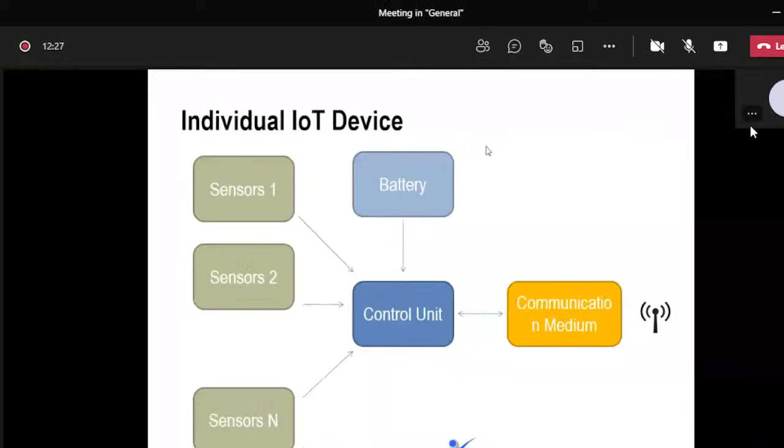If you see a network of IoT devices, different individual IoT devices are connected and can transfer information among each other using internet as a medium. So we can achieve a network of devices here.

The next thing, if you see the general thing about Internet of Things, it is going to provide a better scope for data scientists, and we can have real-time analysis and wide connectivity.

So if you see the main thing required for this Internet of Things is going to be the general devices and the sensing devices. These two are the most important things. The general devices are categorized as an embedded processor or a microcontroller based unit. And the second one is going to be the connectivity for the platform.

Connectivity for the platform, where we can connect and share information through wired mode, or else we can go for wireless mode in order to have data transfer.

If you see the sensing devices, the sensing devices are sensors which are going to measure the parameters, for example, temperature, noise, light intensity, and if you want to measure the humidity. So like this, we can measure different parameters by using sensors.

The general devices and the sensing devices are the major important thing for an IoT system. The best example is where the home appliances are controlled by sensors. So each sensor is going to help us to solve the problems.

Okay, so in the small video you have just come across, how NI is providing solutions on different engineering problems, how NI is giving solutions on different industry sectors. Same thing whatever you people have seen on slide, they're providing support to solve engineering problems on semiconductor based industries, automotive.

Automotive, when it comes into picture, for electrical vehicles, that is the most important thing moving around the world. For battery management systems, and to simulate and analyze the performance of electric motors used in electric vehicles, they are developing HIL hardware-in-loop systems where they can simulate the motor and check its performance in the system itself. And for ABS anti-locking braking systems, or electronic control units, in order to test the ECU present in the car, they will be using NI technologies, software as well as hardware platforms.

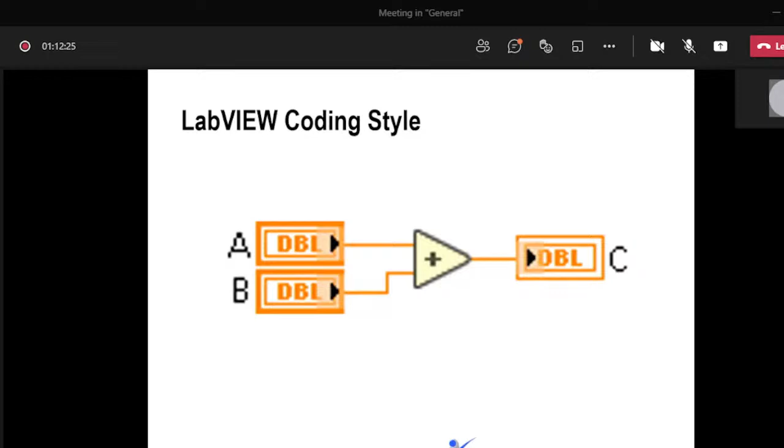Another important reason for using LabVIEW software is that it has a lot of software libraries. We can easily integrate third-party hardware, and you can also integrate or connect your NI hardwares. So this is another reason.

As I told you, the name itself is Laboratory Virtual Instrument Engineering Workbench. So we can build a virtual instrument by using LabVIEW software and the hardware.

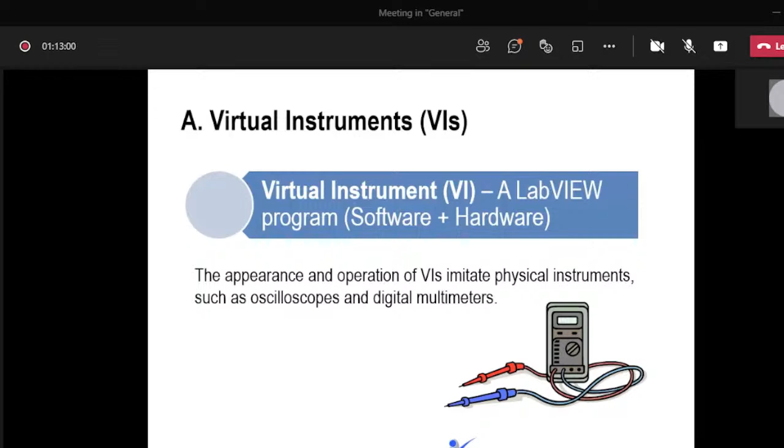The best example I can tell you is these two devices, known to all people: one is the CRO and another is the multimeter, used to measure information like voltage, current, and other parameters. On the oscilloscope you can view the information as a waveform. This equipment can be virtually built by using NI hardware.

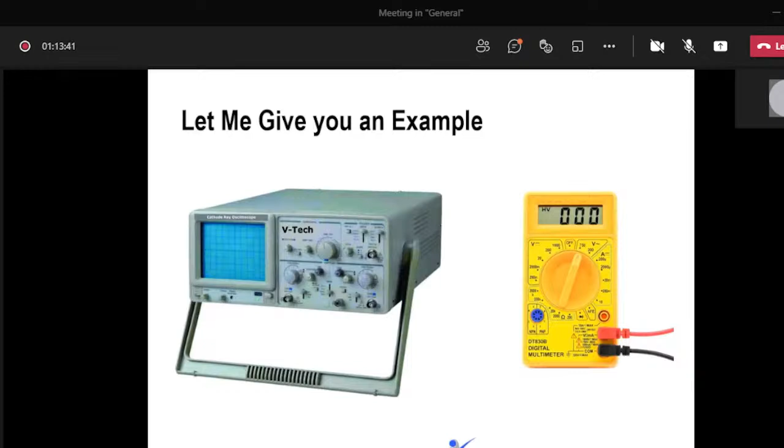So virtual instrumentation is a combination of software and hardware. If we know how to work with LabVIEW and NI hardware, we can virtually build the equipment.

This is the virtual oscilloscope, exactly what your real-time one does. The same thing can be done with the help of this virtual oscilloscope.

And the next one, digital multimeter, which is used to measure different parameters like voltage, current, continuity, all that information. It is making our job very simple.

If you know how to work with NI hardware and LabVIEW software, if you want to do any experiments or test any circuits, instead of moving into a lab with a function generator, oscilloscope and all those things, if you have a breadboard and the respective components in your place, you can just connect it, build a circuit, use NI hardware and LabVIEW software, and complete your experiment right at your workplace.

And if you want to make a remote or IoT based system, make your system connected to the internet, and you can share information from one place to another. This is an example of virtual instruments, where we can make our workplace an engineering workstation.

So with this, the explanation about the Internet of Things is over, our introduction to IoT technology is over. Next we are going to move into the demo part. First we'll learn about the LabVIEW tool, LabVIEW software, and the different functions available here which will help us develop an IoT based system — only the basics, not in depth.

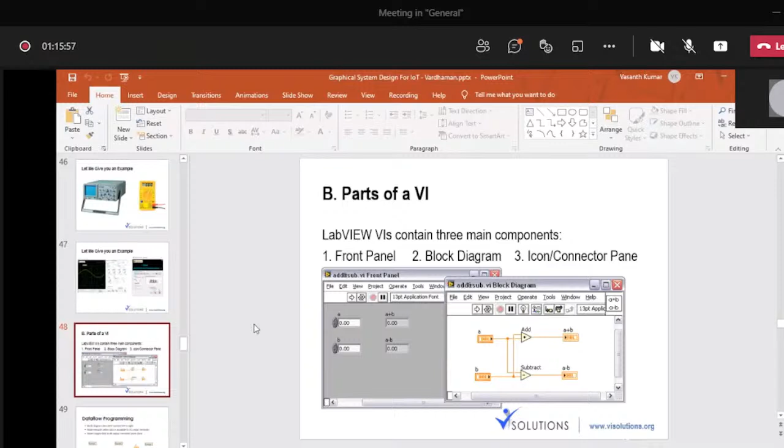So with this, I'm moving into LabVIEW programming. I hope you have installed the LabVIEW software in your systems. When you search your Windows button and type LabVIEW, you'll get the software installed here. When you open the LabVIEW software, this is the screen we get in order to create a VI.

Here, each and every program will be called a VI. VI corresponds to virtual instrument. So if you want to create a VI, go to File, click File, and you can see there is an option called New VI. Just click on New VI, or else we have a shortcut called Control N. Click on New VI.

Once you click on new VI, you will get two screens. Whenever you open a LabVIEW file, you will always get two screens. One is called the front panel and the other is called the block diagram.

You can ask a question: what is the use of front panel and block diagram? In the previous slide, I told you that SpaceX used LabVIEW software to build GUI, graphical user interface. So in order to make a GUI in LabVIEW, we need a front panel and a block diagram.

So what is the use of front panel? Front panel is for the user interface, where the user can interact with the program through the front panel. And what is the use of block diagram? Block diagram is the place where we'll be developing the application, where we'll be developing the logic.

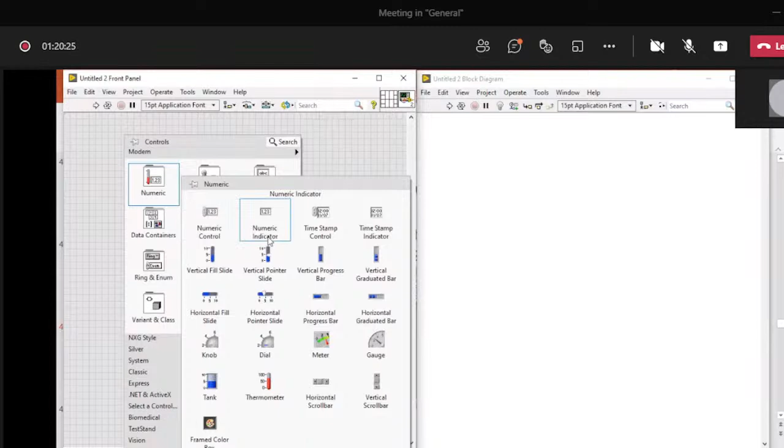If I place my cursor on the boolean palette, I'll get the respective boolean controls and indicators, same way for strings and for arrays and clusters. So all your controls and indicators will be available in the front panel, in the control palette.

If I right click on the block diagram and place my cursor on the numeric palette, all the respective functions or operators will be available in the block diagram. Boolean functions will be available the same way, and array functions will be available there. So this is how you can get your functions and your controls and indicators in LabVIEW.

So the basic thing, as I told you, if you want to develop a small application, a small addition program application, right...

So we need two controls and one indicator. Right click on the front panel, go to numeric. We have a numeric control. Just click and place it here.

So this is how your control looks, and you can see here in the block diagram it is enveloped by an orange color. One advantage here is each and every data type will be represented with different colors. So numeric, the DBL data type, fractional numbers, a double precision floating point number, will be covered by an envelope box. It looks orange in color.

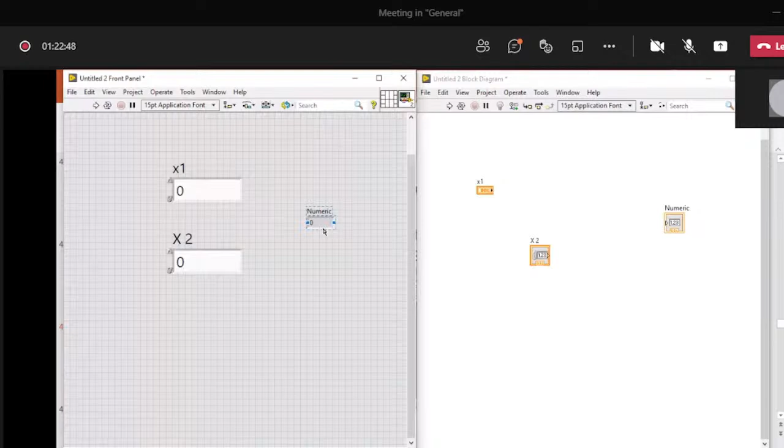If you want to have another control, right click, go for numeric control, and place it in the front panel. So now another one, I can give it as x2, x1. To see the result, I need an indicator. See, this is an indicator. So the result is going to be y equal to x1 plus x2.

So to add two numbers, we have two controls and one indicator. We need an operator. Go to the numeric palette, there is an addition function. Click and place it here.

So when I connect this, how can we connect? In our breadboard, if we want to connect components, we use wires. In the same way here, we'll be using the wiring tool. Simple: place your cursor on the controls or indicator edges, just click and connect. See, automatically a wire will be available.

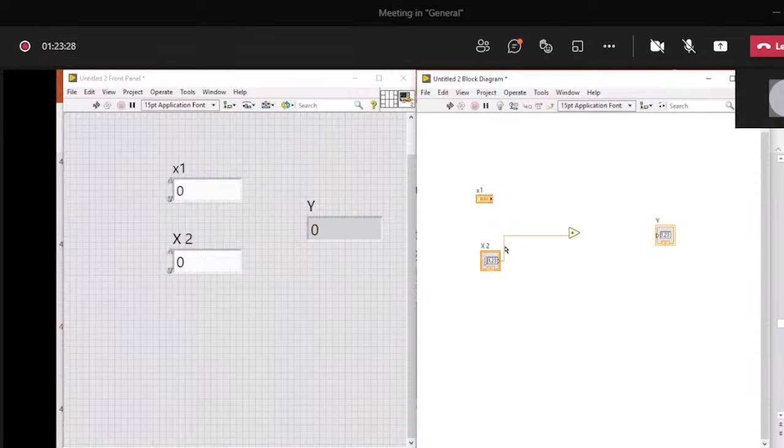Place the cursor on the border, click, and you'll get a black color structure. It's the wiring tool. Just click, drag, click, and you can connect. Click here and connect, that's all, your addition program is done. So we can easily complete the addition program by having a control, indicator, and addition operator.

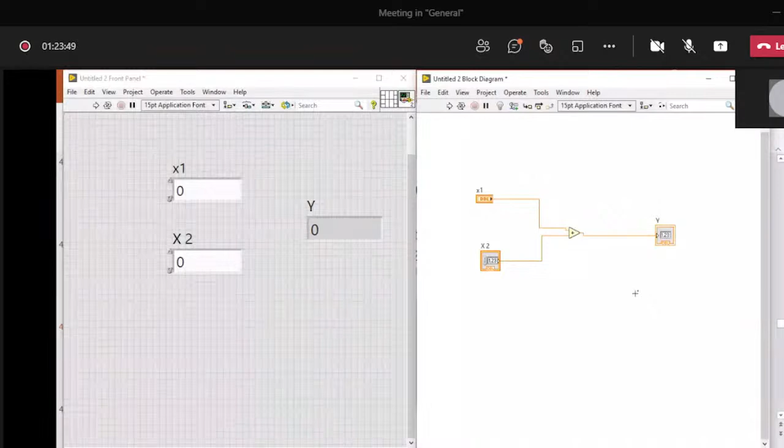If you want to see the result and run the program, press Control R, or else you can go to the menu. Below the menu there is a run arrow mark, which represents run. This will be available in the front panel as well as block diagram.

If you just give a click, the program will run and automatically give the result. So easily an addition program has been done using the graphical programming language LabVIEW, by having only two controls, one indicator, and one operator. This shows a major difference between a text-based programming language and a graphical programming tool.

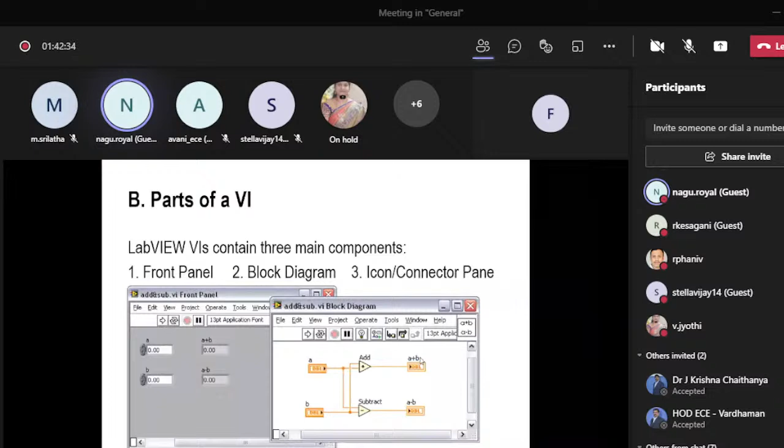So in this session we'll be learning how to develop an IoT based application. So far we have seen the introduction to LabVIEW and the data types, and I've just shown you a small addition program and how LabVIEW differs from other programming languages. LabVIEW follows a data flow programming concept.

When you look at any other text-based programming language, we write lines and lines of code, and each line is executed from top to bottom, from the first line to the last. But here, since it is completely a graphical programming language, it follows data flow programming. You may ask, what is data flow programming? The flow of data from one point to another determines the order of execution. This is what we call the data flow programming concept.

Next, we'll see a few functions, and then we'll move into the hardware part. Before that, I'll open the LabVIEW screen.

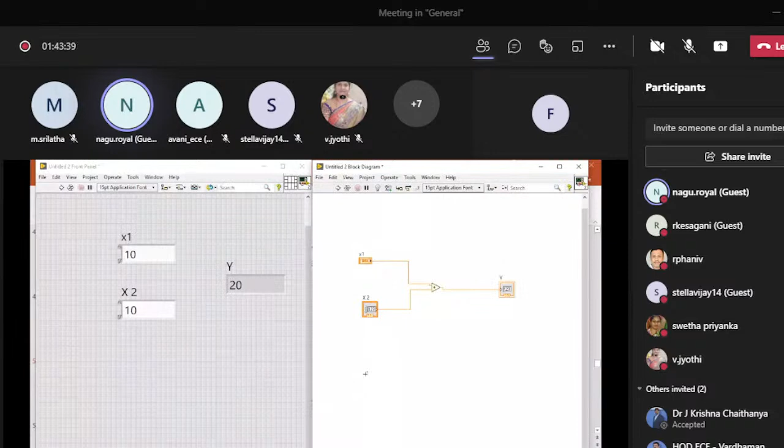I've just shown you only the addition program, right? So if you want to see the other data types available in LabVIEW, let's go for a Boolean, because I'll be using these Boolean data types in the IoT application.

I've taken a Boolean control from the front panel, and the same thing appears in the block diagram. If I right click, I get an option called 'view as icon.' If I remove the tick mark, it appears like a small rectangle box. I'll use a magnifier so I can zoom in.

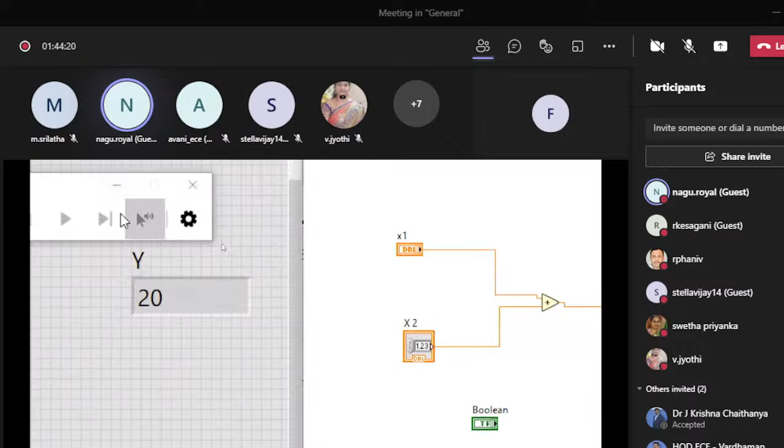This is how your control looks for the Boolean data type. It is green in color. Inside they have mentioned TF, and the green color envelope is the color of the Boolean data type. Now if I take an LED...

If I connect it, this is how the Boolean wire looks - see, it is green in color. So in LabVIEW, your Boolean data type wires will appear green in color.

And if you want to see string, go to the front panel, string control, place it in the block diagram, and see - they are marked as ABC, and it has a pink color. If I make it 'view as icon' by right clicking, this is how it looks. And to have a string indicator, I'll place it here.

I connect. Okay, good. And if I run the code, the data will be passed.

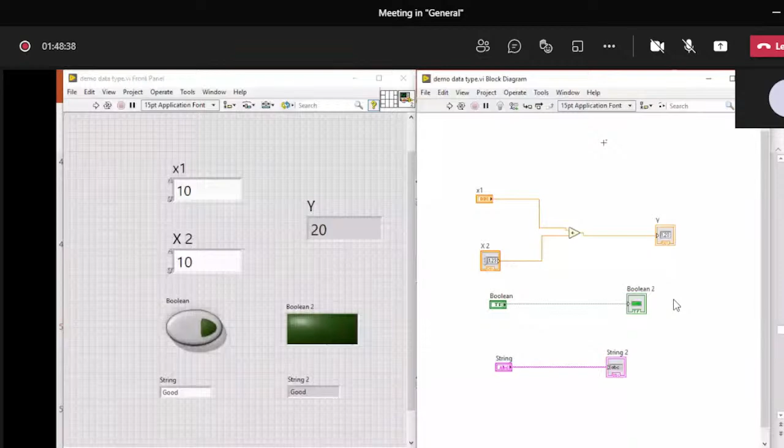We'll not go much deeper about the LabVIEW environment because our goal is to develop an IoT based application, so whichever functions I'm using here, only those functions will be explained. Now I'll be explaining two more functions here.

I'll go to the block diagram part. This is a place where we'll get all the functions and structures which will help us to complete your application. In that, if you see, there is a palette called structure palette.

So there is a palette called structure palette. If you see here, these are the different structures which are supported by LabVIEW, in order to do any process.

Simple example: when we go for text-based programming, whenever you have a conditional based requirement, we will be using the if-else statement. If the condition is true, then you want to perform an action, so you will use if-else. You will be writing another portion of code, where we can see whenever the condition is false, if you want to take some action, you can develop the logic in your false statement.

So when you go for text based programming, you need to follow syntax. But as it is a graphical based programming language, syntax is not required here. And if you see, the same if-else statement, the conditional based requirements can be developed and applied in LabVIEW also.

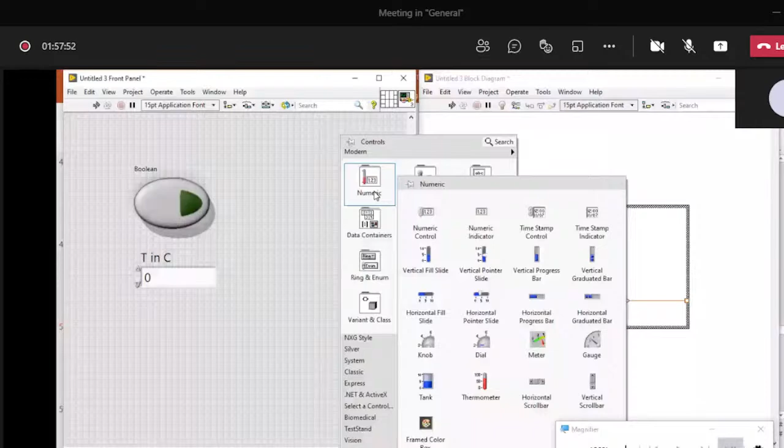Create constant, I'll go for 32. The result will be displayed in an indicator, right? So right click, numeric indicator. It's here. T in F, okay, so that I can give it here.

So this is your result, and if you see here, when the value is false, I want to see the temperature value as Celsius.

One concept here: whenever you try to pass any value from outside of the case structure, a tunnel from inside to outside is created, and this is what we call an output tunnel. If you see, the tunnel is not completely filled by the data type color, because we have one more case called false case, where the tunnel is not wired with any value. That's why it is not filled by the data type color.

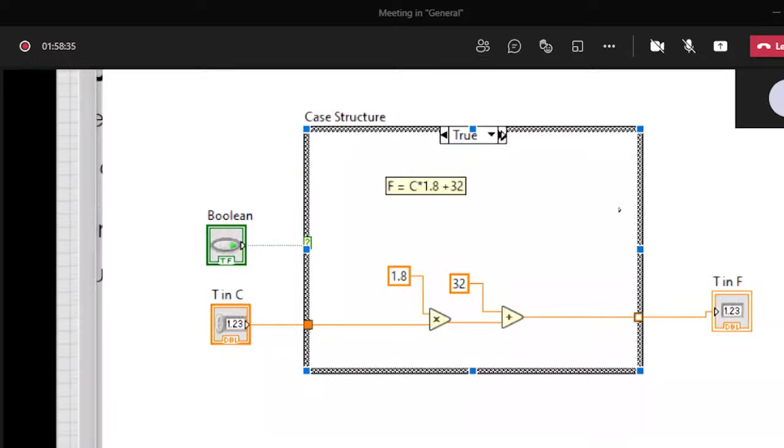And if you see, the run arrow mark appears in broken format. The concept is, whenever we try to create a tunnel at the right hand side of the case structure, that tunnel is called an output tunnel. That tunnel should be wired in all the cases, or else your run arrow mark will appear in broken format.

So here I want the value to be directly displayed in Celsius when the condition is false, so directly you can connect. I'll mention C/F, because when the condition is false, it will be in Celsius. When the condition is true, it will be mentioned in Fahrenheit.

Even I can change the label also. For that, I need to do small logics over there. Even if you want to see that, I can change the label.

During the false case, create - there is something called property node. Please don't focus on this, I'll just change this label around.

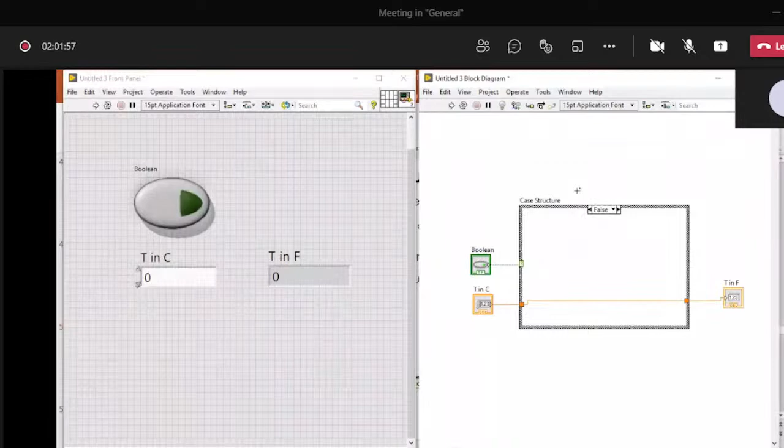Sir, continue sir. Yes ma'am, thank you. Now when I just run the code, when I just enter the temperature value as 100, I have not pressed the button, the value is false, so that's why the value is directly displayed. When I click the button, the true case gets executed, so your Celsius value will be converted into Fahrenheit and displayed in the indicator. When I press the run continuous button again, the program will come out of execution.

So this is how you can make use of case structure, whenever a conditional based requirement comes into picture. By implementing this case structure, you can implement a conditional based requirement which we implement in text-based programming language using if-else statement. In LabVIEW, we use case structure for that.

So this is how your case structure works. Just know how it works, that's fine for now, because we have short time, we have to discuss the hardware used for IoT based application, and finally move into the application development part. So I'll save this also if you want.

I'll just save this, hit save, and now I'll close this new VI.

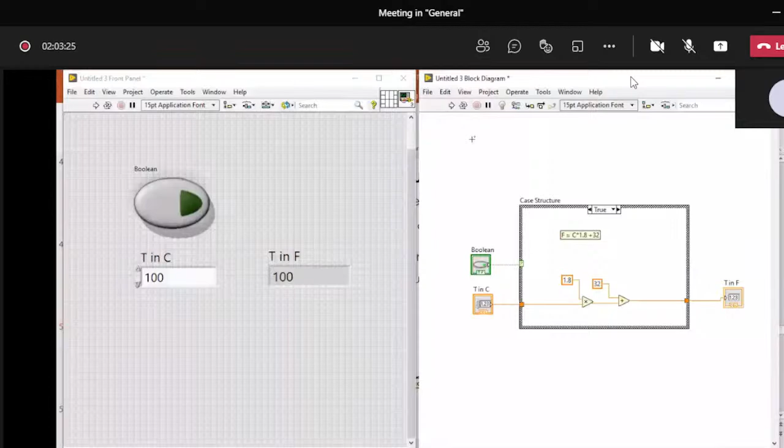Let us move to the hardware part, which I'm going to use for today's IoT based application development, and then we'll come back to a few more concepts. Today, as the FDP is titled on Internet of Things, we've discussed IoT concepts, IoT architecture, and industrial Internet of Things. So we are going to see a live demo of how we can transfer data from a hardware - how, when a sensor is connected to a hardware, we can read the real-time data.

So, when the device as well as another device is connected through internet as a medium. For that, today I have chosen NI technology, National Instruments, which has both hardware as well as software platform. The software I'm going to use to develop an IoT based application is LabVIEW, and the hardware I'm going to use for today's IoT application development is Rio. The hardware name is called myRIO.

myRIO comes under the National Instruments family of hardware. The expansion for this Rio hardware is reconfigurable input output. Using this hardware, we are going to build an IoT based application. You can ask the question, why did you choose this Rio hardware? Because NI has a lot of family of hardwares used for application development.

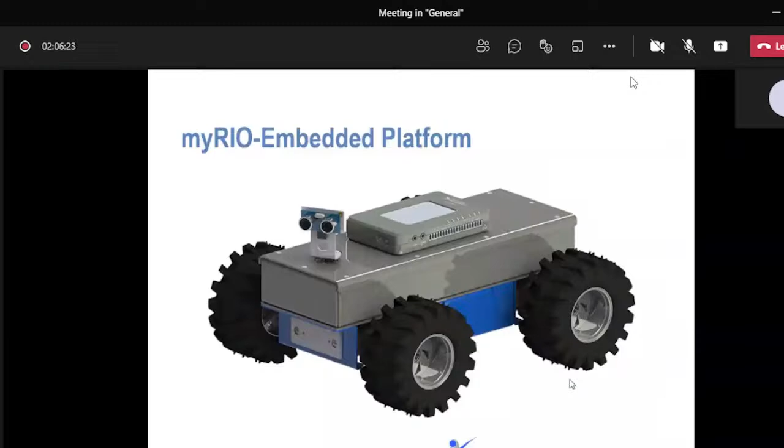But when I go for a Rio family hardware, it's an embedded based platform as well as FPGA based hardware, where I can develop the application, dump the code on the respective hardware, and make a standalone system, or develop real-time applications. Today I'm going to use a hardware called myRIO, which comes under a family called Rio family hardware. Rio stands for reconfigurable input output, where NI has a lot of hardwares mainly used for application development. If you want to see, I'll show only the Rio family hardware.

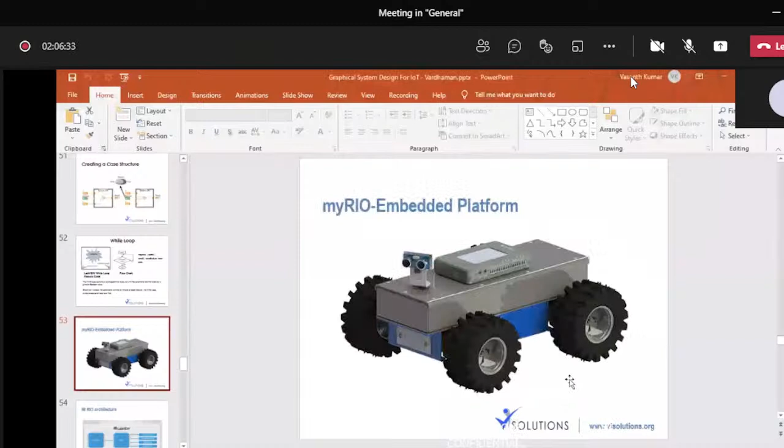NI Rio hardwares, I'll directly go for image. So it's loading. Yes, if you see here, these are the different Rio family hardwares available under NI technology. If you see here, the image which I'm showing now, I'll just try to put the image here. Yes, because with this I can explain all the concepts. So how the hardware will be.

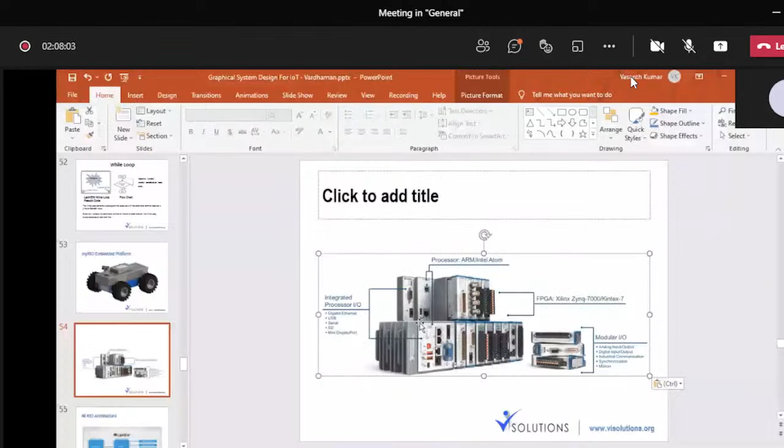Yes, if you see here, this is what we call as Compact Rio. The short form we call as CRIO, which is mainly used for real-time application development. You can ask, what is the advantage of using this hardware, sir? This hardware is rugged in nature, you can use it in any environment, and the most important thing is it has an FPGA inbuilt, and it has a processor also, where you can create a standalone system.

So once you develop an application, as it has a processor here, you can just dump the code in the processor, and you can make this hardware work on its own. No need to be always interfaced with your computer in order to have a data transfer, because this has a processor, it has RAM, it has ROM, it has memory. So we can dump the code and make your application a standalone.

Another thing, this hardware has a capability to interface with internet, so you can have a data transfer. You have an option to connect your Ethernet ports over there. And if you want to have data logging, if you want to connect a USB camera, or if you want to connect a pen drive where you want to log the data, we have a separate slot over there - insert it, and you can make a data logging system also.

And as this hardware has FPGA also, you can develop your program either in processor as well as FPGA, or else you can make use of the processor as well as FPGA in an efficient way to develop the applications. And if you see here, we have something called modular input output - these are called C series modules, we call these actually C series IO modules.

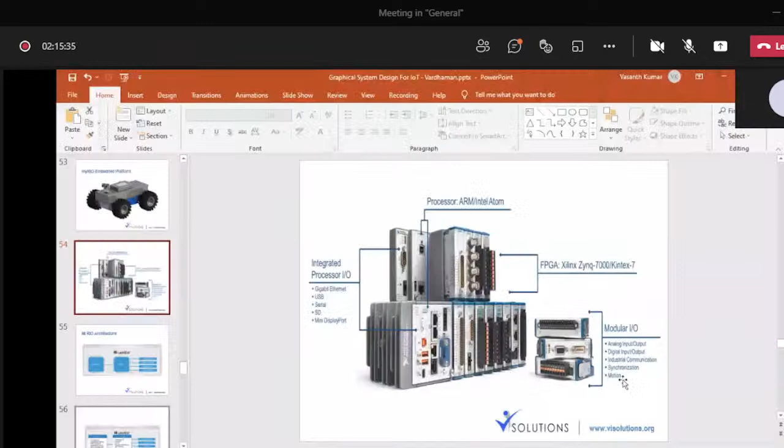I can give you a good example. Everyone knows about cars. Cars have safety airbags which protect drivers and passengers when they meet an accident. Whenever the car hits a barrier at a certain frequency, automatically the airbag comes out without delay and safeguards the passenger. If we use a general purpose operating system, we cannot guarantee that at that exact instant the airbags will come out, because it is doing multitasking and the processor is shared for different tasks. Even a small delay would injure the passengers inside the car.

So in those kinds of critical-based applications, we will not go for general purpose operating systems. That's why whenever we want to make a real-time system, we go for Linux-based operating systems.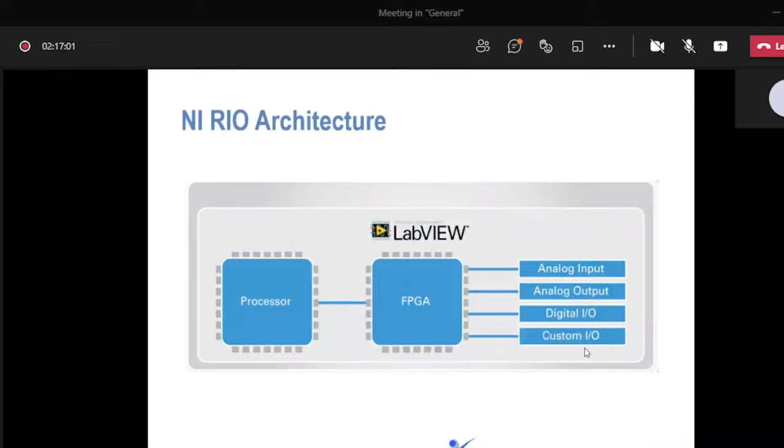If you see, the RIO hardware is also having a Linux operating system inside it. This is the architecture for the RIO hardware. The RIO hardware has a processor, an FPGA, analog input outputs, custom IOs, and digital input outputs. This hardware has a real-time operating system, and it is like a regular computer.

For example, when you buy a computer, first you have to install the operating system, and then install the application software required to work on your laptop. In the same way, with the RIO hardware, we have to first install the operating system, and to develop the application side, we need to install the respective application software and drivers inside this hardware.

As I told you, it has an FPGA processor as well as IOs. Since all the input outputs are connected directly to the FPGA IO, there will not be any delay between the IO terminals and the FPGA systems. As it is directly connected, the values are passed directly to the FPGA through the processor and get processed. It's not that you have to develop code only on FPGA or only on processor - we can make use of both processor and FPGA efficiently to develop a standardized application. So this is the architecture for RIO hardware.

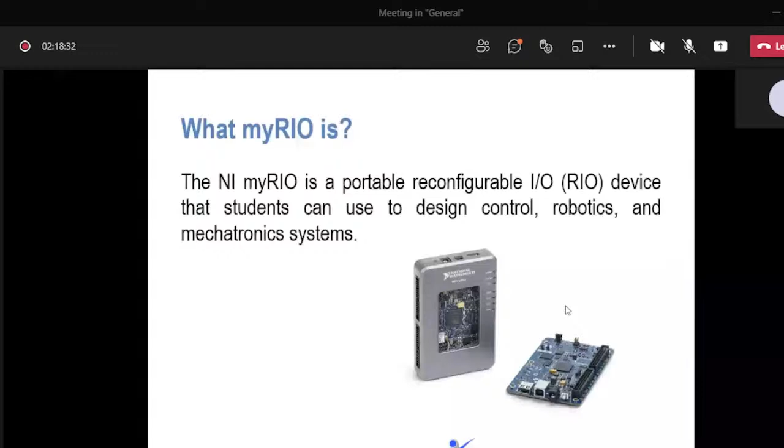For today's session, I'll be showing a demo on myRIO, which is called Reconfigurable Input and Output, the expansion, which we can use for control robotics and other application development processes. I am using this hardware for today's demonstration. Why I have chosen this hardware is because it has an embedded processor and FPGA inbuilt, and I can develop a standalone system.

The most important thing is this hardware has the capability to generate a Wi-Fi signal up to 150 meters. It has an onboard Wi-Fi, or we can connect this software with the hardware using existing software or existing internet available, and have data transfer. That's why I have chosen this hardware for an IoT demo.

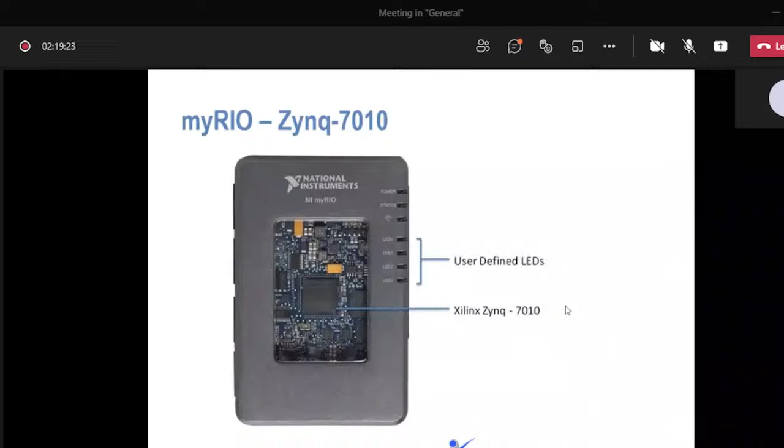Now if you see, this hardware has some onboard devices. It has 4 user LEDs. It has an accelerometer onboard. It also has a push button, so where you can make use of it for your application development.

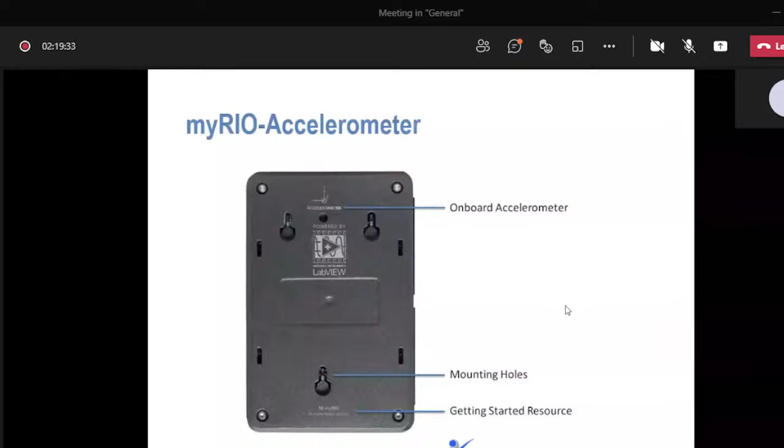Now, since this is an electronic device, it needs a power supply, so it needs 6 to 16 volt power supply. There is an option called device, which will help us connect your PC and your Rio hardware for code development and code deployment. At the same time, if you want to do any configuration settings, make sure your Rio as well as your system are connected through this device port. There is also a USB port for connecting your USB based devices.

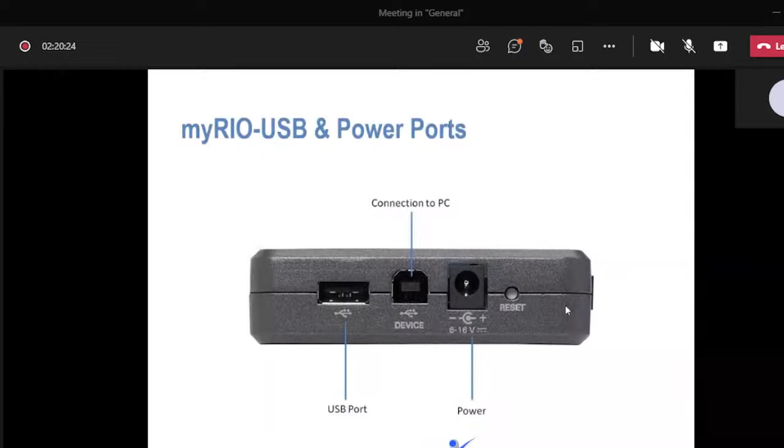You can just make use of these pins either as digital in or digital out, or a combination of both, few pins as DI and few pins as DO. At the same time, if you want to generate PWM signals, you can go for DIO 7 and DIO 3. You can make use of these pinouts to connect your analog and digital sensors.

Now next, if you see, we have 2 more pinouts, one is called MXP A port and MXP B port. These have 2 ports, A port and B port, which are used for connecting your sensors. It has analog input pins, analog output pins, digital input pins, and digital output pins.

So if you have any protocol based sensors, like SPI, UART, and I2C based sensors, those sensors also can be connected using this MXP port, and you can acquire the data. This hardware supports serial communication protocols. There are n number of advantages when we go for this Rio hardware, that's why I chose it for today's demonstration.

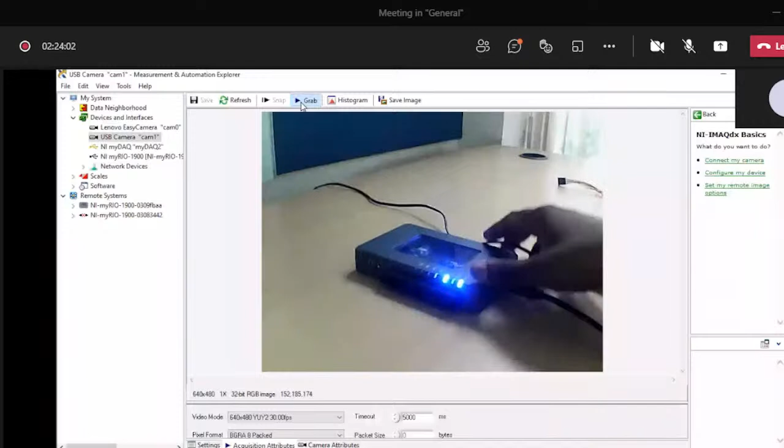Yes, you can see this is the hardware which I'm going to use for today's application development. This hardware is called MyRio, which stands for reconfigurable input output. I hope you people can see the device. As of now, I have connected my hardware through Wi-Fi.

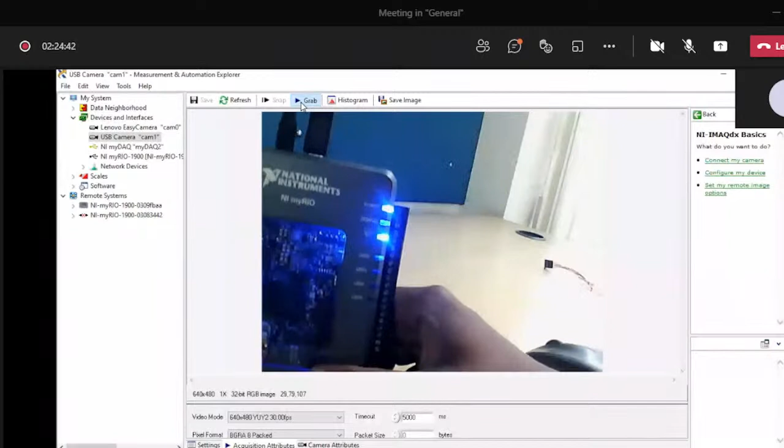So if you look, I can show you clearly, it has a user LED, the power LED is on which means the device is powered, and the Wi-Fi LED is on which means my device is connected through Wi-Fi. It has onboard user LEDs 0, 1, 2, and 3. This device is connected through internet now, and it has a push button as well as a Wi-Fi reset button. This is the hardware which I'm going to use for today's IoT demonstration.

And if you see here, this is the port which we call the MSP port, the mini system port, where it has 8 digital input output pins and analog input output pins.

If you look here, these two ports are what we call the MXP A port and MXP B port, where you can interface your serial communication based protocol sensors and have a data transfer. As of now I'll be using this hardware for application development.

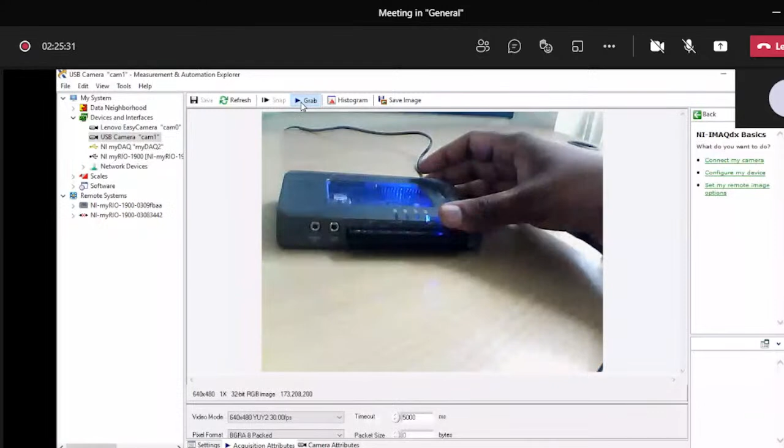This is the hardware I'm going to use for today's application development, and it is configured through Wi-Fi. I'm removing this USB connection also, which is not required now because I've connected my hardware through Wi-Fi. Only the power cord is connected with this hardware. Apart from that, we don't have any connection with the hardware to my personal computer. This is how we have connected it.

Now let us go for application development. Next step is we'll be moving into application development. So I'll just stop the grab.

If you want to see whether the hardware is connected with my system, there is an option called remote system, and there is an option called NI myRIO. This is the hardware which is connected with my laptop through Wi-Fi. I've just used my mobile internet to connect my system as well as my myRIO hardware on the same local network. You can see this is my Wi-Fi name. Through Wi-Fi only my device is connected, that's why my Wi-Fi LED is glowing in blue color.

And if you see the IP address, it is 192.168.43.253. So this is going to be the IP address. Now let me show how to connect this device and how we can develop logics.

Let's see how we can develop the logics to read the information from this hardware. As it has onboard sensors, let us see a small demo of how I can read and write data from this device to my application through wireless mode. Next, we'll see how we can have a data transfer between two different devices when connected through local network, and then we'll see a cloud demonstration.

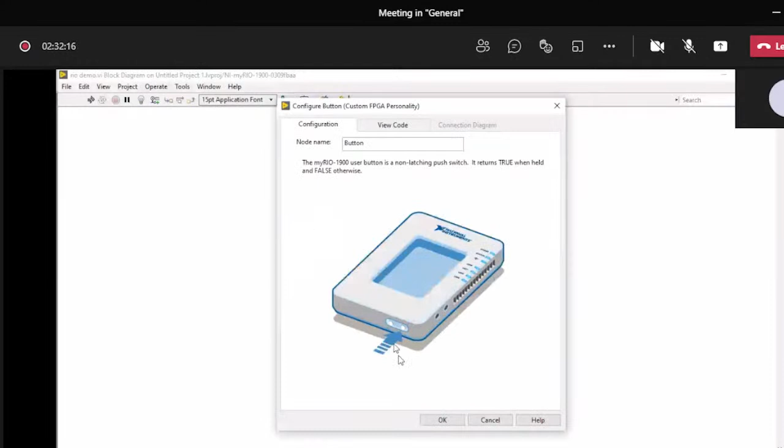Okay, this is the button. So it has to get configured. And next step, I'm going to use an LED, the onboard LED.

So go to the myRIO palette, take the LED, and place it here. Let me use LED 2. Okay, or else I'll use LED 3 alone. Now the LED will be configured, and directly I'm connecting the button and the LED.

To run the program continuously, you can go for run continuous, or else I can use a loop. Let me use a while loop here. I'm introducing a new concept called the while loop. Whenever you want to do any process in a repetitive manner with respect to conditions, you can make use of a loop. So this is how your while loop appears in LabVIEW. Whatever code you develop inside this while loop, it's going to run continuously with respect to the condition.

This while loop has two terminals. One is called the iteration terminal, which tells you how many times the loop executes, and it has a conditional terminal. This conditional terminal is configured as stop if true. When I right click, you can see it is configured as stop if true, which means whenever it reaches its stop value, it will come out of execution. That's why when I right click and create a control, a stop button is automatically created.

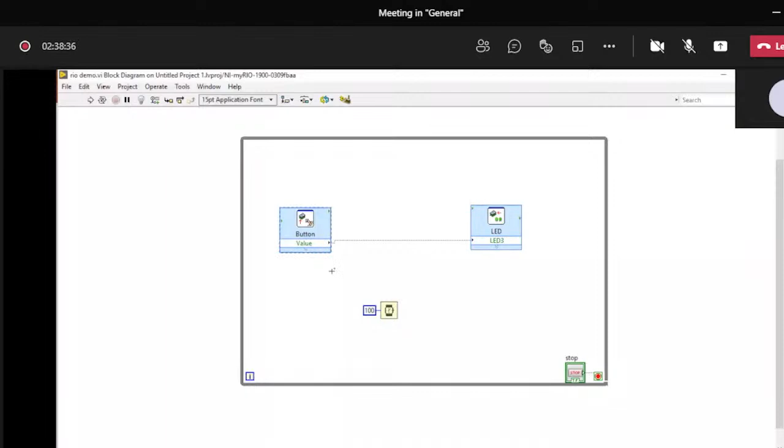Now I'm not going to use a button. See, I have LED 3. When I press a button in my mobile phone, automatically the Rio LED should get turned on and turned off with respect to the command which I'm giving through my mobile phone here.

So for that only we have to use shared variables, or else we call this actually network shared variables. So right now we'll see how we can make use of this shared variables.

In LabVIEW we have different types of variables available. One we call it local variables, which is used to transfer the data in a single VI. Second, we have global variable, which will help us transfer the data between multiple VIs. Third, we have network shared variables where we can transfer the data with different targets, with different LabVIEW targets.

So today I'll be using a shared variable in order to have a data transfer from my mobile phone to my myRIO hardware. So for that, I need to use these shared variables.

At the same time, my myRIO hardware has an accelerometer. This is a 3-axis accelerometer which is used to measure the tilt, vibration, and the acceleration.

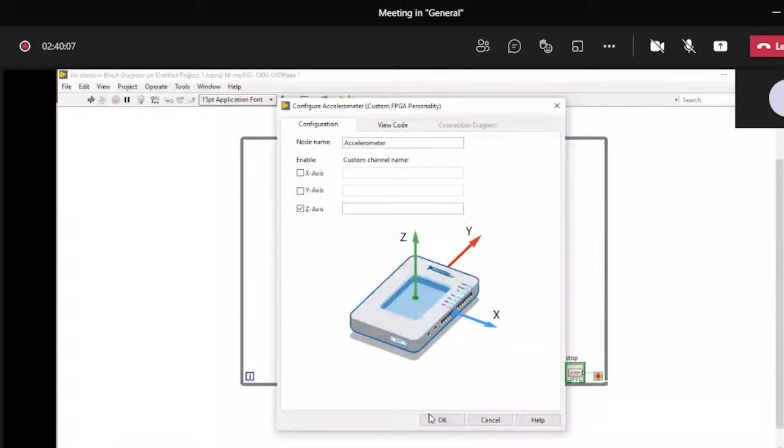So I'm going to measure the z-axis value in my mobile phone, not in the front panel of this application. So I'll be viewing the value of z-axis in my mobile phone, by using shared variables.

Let us see how we can have a data transfer between my myRIO hardware and this mobile phone. So for that I'll be using shared variables. In order to use shared variables, I'll go to the project screen.

Okay, I'll go to the project screen. I need to create a shared variable.

In order to create a shared variable, right click on your Rio target, new, there is an option called variable. When you click on variable, automatically a new library will be created, and then it will pop up a message asking which type of variable you want to create.

Let me give this as switch. It's a network published variable, data type Boolean. I provide okay, and you can see a library will be created, and you can see untitled library switch, a shared variable is added.

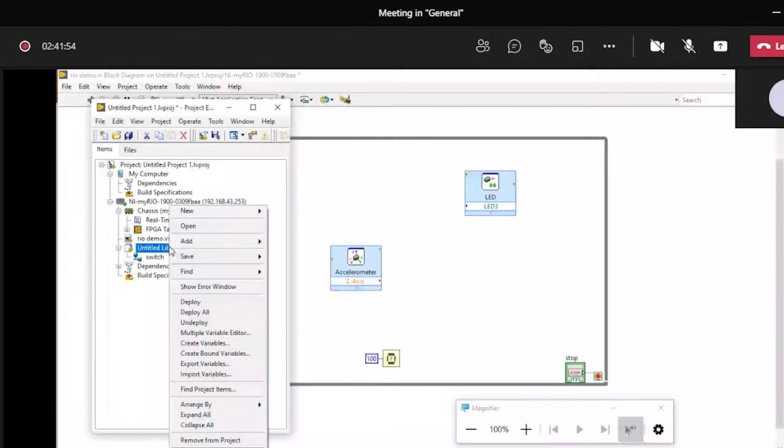I'll go for magnifier. I need to add one more variable to view the accelerometer data. For that, don't right click your Rio and go for new and select variable, because already a library is available. So right click on the library, new, select variable. It's going to be ACC data, I'll mention in short form, it's a DBL value, provide okay, and another variable is added.

If you want to give any string information, if you want to read a string data from your mobile phone to LabVIEW, I'm going to add one more variable - data or message - and it's going to be string data type. So 3 variables are added.

File, go for save, it will automatically ask you to save the library. The extension will be .lvlib. I'll create the library name as FDP library, give enter. Automatically the library is also saved now. Library is saved, your library shared variables are created.

Next step is how to call those shared variables to your block diagram. There are 2 different ways. One, structure palette, there is a variable called shared variable. Select and place it here. If you place it here, it looks black in color.

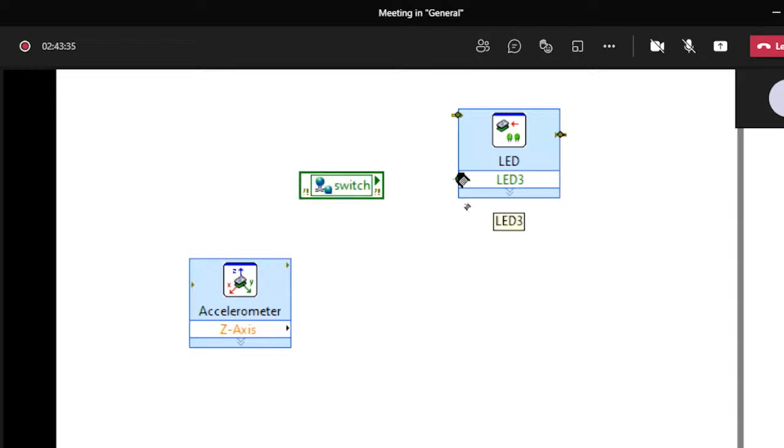Place your cursor on the shared variable, you'll get a finger symbol. Click select variable, and this is your hardware, this is your library name, and if you want to take a switch, select switch. Automatically a shared variable will be created, and wire it. Okay, this is one method.

Another easiest method: place your project screen in your block diagram parallelly, select the shared variable, drag and drop it in the block diagram. This is one method, the easiest way. By default it will be in read mode, so you can go to access mode, change to write, and connect.

Now we have to see the message. If you want to share any message on the front panel - I don't have any controls here, only stop button to stop my program - string, this one, string indicator, this is just to display message. I'll just keep this here. Now your code is ready.

The only thing is we need to call the shared variable to display the message. Structure, shared variables, view, library - this is one method. Another method, message, a shared variable will be added. Connect. So now your program is ready.

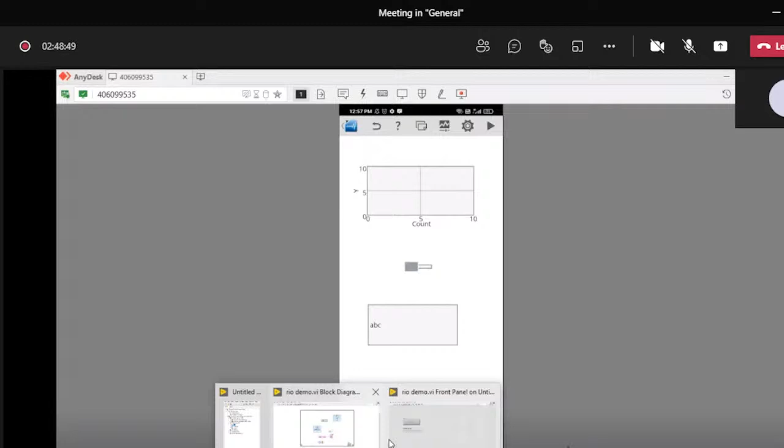Now I'll go to the code. I'll run the program. It is asking to save. Deployed, the program is ready to run. I'll minimize the screen so that you can see all the data.

Block diagram is not required. You need to see only this AnyDesk screen. Now here also I'm going to configure. There's an arrow mark right here, and another arrow mark here. Click run - if you just click here, it will get executed, or else you can give stop here. This is to run.

Now we need to configure each and every control and indicator with the shared variable. For that, you'll get a hyperlink here, this one, which I'm highlighting on the screen now. Click that - it will ask you for shared variable. Select, you have to enter the IP which is available here.

So I'll enter 192.168.43.253. When I just give connect, see, it will show my library names. What is a library name? FDP library. Click on FDP library. So I want to configure accelerometer data. Select, it's configured. Next, switch.

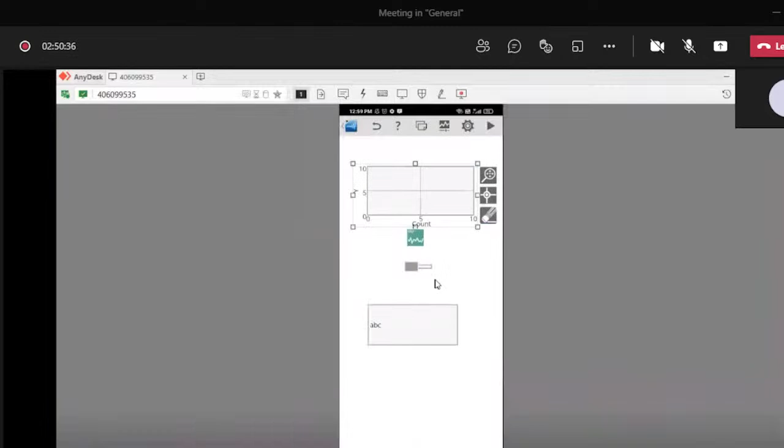Switch, shared variable, select the IP, library, switch, configured. Next one, string, shared variable, library, message. Okay, all are configured now. I can just run the code.

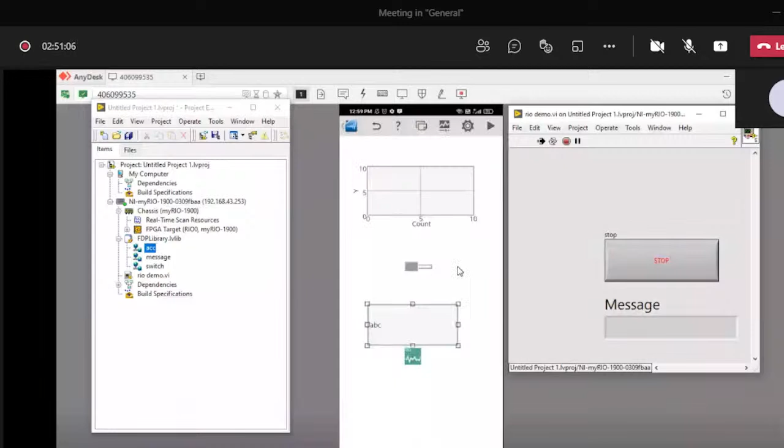Run. See, when I just click the button, your device will get turned on. And if you want to see the string information, I'm going to type now: Good afternoon. When I just give enter, see, that message will be displayed on my screen here. I'm typing on my mobile phone, and that will be displayed over there, if you want to check that.

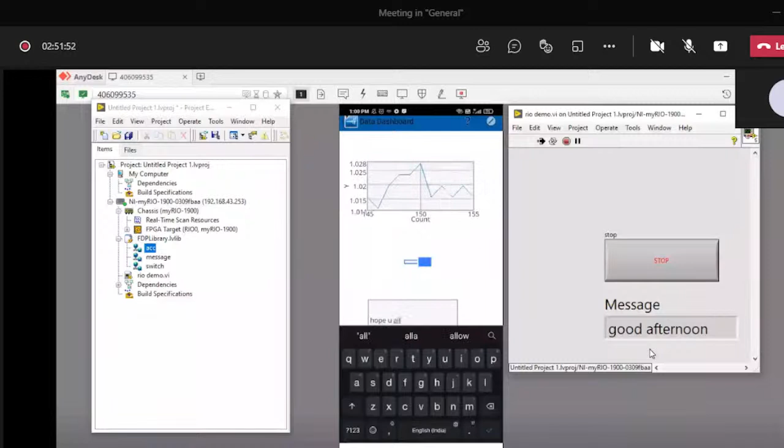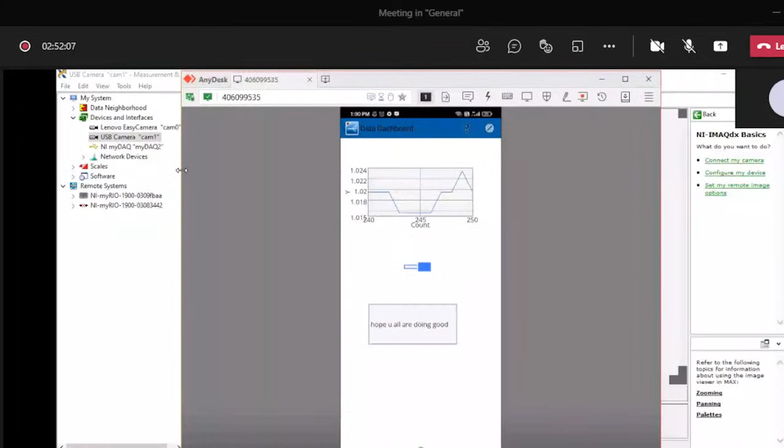Hope you all are doing good. When I enter, see, that message will be displayed. And if you want to see whether your myRIO LEDs get turned on or turned off, when I press the button here, I'll go for NI Max, AnyDesk, maybe I'll minimize and show this also, which I'll place it here.

You can see my myRIO hardware, and you can see this AnyDesk screen also. See, when I press the button, the LED is turned on. See, when I press the button here, see - you have to look here. See, when I press the button, the LED is getting turned on and turned off.

So this is how you can use your data dashboard applications whenever you want to transfer data between two different targets when connected. Using NI technology, whenever you have two different LabVIEW targets connected to a local network, we can have a data transfer. So this is a small demo where we can implement, or transfer the data, by using Internet of Things, by connecting your hardware through this myRIO, where we can have a data transfer.

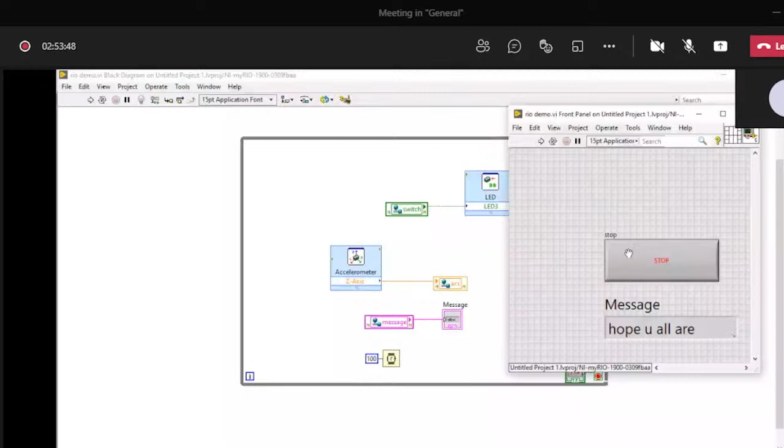So this is a small demo where we can share the data among two different targets when connected through a local network, and by using internet as a medium, we are transferring the data over there. Please let me know if you have any queries.